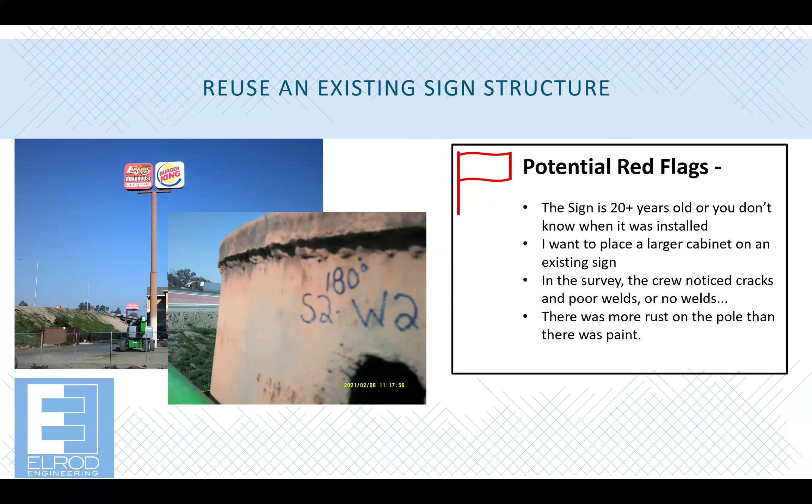Which gives us our point. So why would we want to invest in an inspection? We just went over the increase of storm patterns, existing structures that a lot of us use daily, public safety. And we've all heard of sign failures. Some have cost people their lives, and we want to help prevent those if possible. You and your client spend a large sum on signs. So anything that we can do to help prolong the life of it, we should definitely try.

These are some of the main reasons we see a need for inspections. And, of course, why we get so pumped to speak about them, it's truly a good day at work when we get to focus on structural inspection reports. So let's get into some of the weeds of what an inspection involves and some of the details we look at.

So one item that helps with any inspection is consistency, a ton of details for your crew to have when they're out in the field. So when first starting an inspection, we put together a detailed scope of work, images, callouts, and forms for your crew to use and fill in. We understand that the guys on site could be anywhere from 50 to 100 feet or more in the air. So we want to be sure that they have something simple and safe while getting all the information that we need.

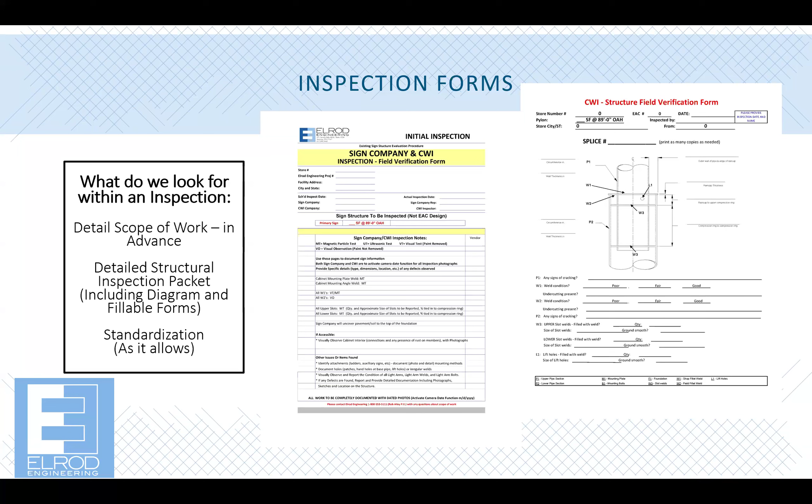We're an engineering firm, so we really enjoy getting tons of information. You can't overwhelm us with too many photos or notes. But this is just the beginning stages of when we research the sign, we create these forms and we really dig into what information we're going to need to perform an analysis to give you the best recommendation we can.

So who is involved in a structural inspection? Well, it takes a team. We utilize a certified welding inspection company, KTA. They're on site with the sign company to help test the welds and gauge the pipe thickness.

You yourself, the sign company, will be there. You are a vital part to make sure we have a lift, someone there on the sign, and we're all working together to gather the best data possible for the engineering review after the inspection takes place. Now, working with a large team like this does take some coordinating, but once you have an inspection approved, we can easily get a CWI tech scheduled to meet your crew on site.

KTA has partnered with us for years. They're very familiar with what we look for and can help crews make sure that we get all the data that we need. We also check in with the crews while they're on site. That way, if there's any centerline cracks or things that need to be addressed while you're there, we can take care of those. So it's also good to have a certified welder on site.

It can be beneficial when inspecting an unknown sign that may have some issues with it, because you just never know what you're going to see. I'm sure you guys have some stories to tell also of what you've seen on site.

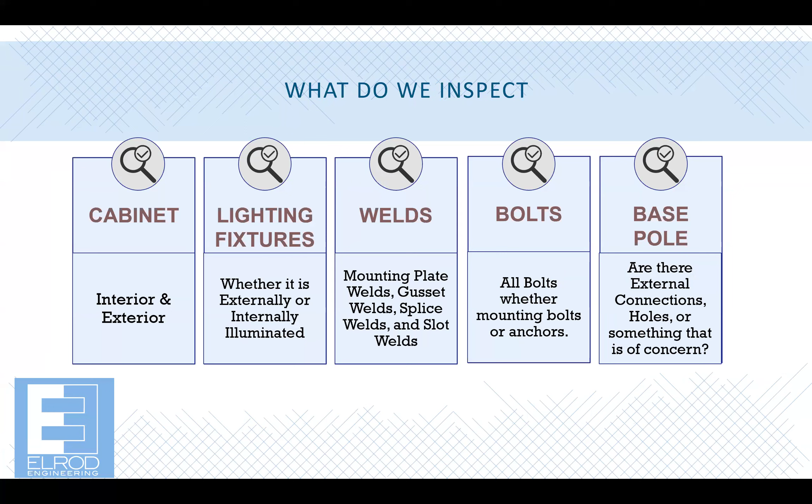So what do we look for in an inspection? We inspect the sign from the top of the cabinet to the bottom of the pipe. We can even get an excavation team out there to dig around the base of the pole and the foundation to confirm there's no corroding near or beneath grade on the pole.

We can inspect the interior LEDs or external light fixtures, because while we're there and while you all are on site, we want to gather all the information we can so that way you and your client can recommend and repair everything that needs to be done. If a light's out, we can get that fixed. So it's not just about the structural stuff. We want to take care of the non-structural stuff as well. We want to help preserve the brand image.

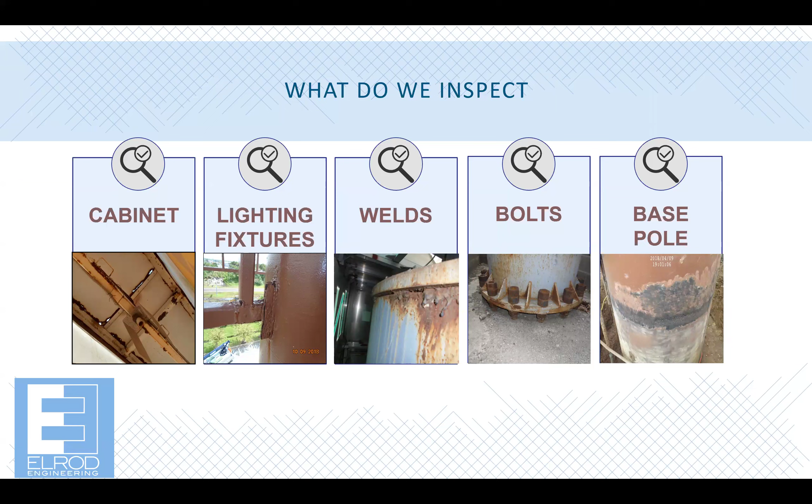So let's go ahead and get into what we look at for each specific location on the sign and some of the details behind it. So looking at a cabinet, the interior of the cabinet, we want to make sure that there's no significant moisture entering the cabinet, limited rust, paint peeling. We want to make sure the internal members are staying how they should, of course, and we also want to avoid any open holes in the top of the cabinet or areas that have rusted completely through.

As you can see in that first photo in the top of the cabinet, it's almost gone right there. You can see the sunlight coming through, which is not good. So we do see a lot of rust, paint peeling, and swollen members in the coastal regions. The protective coatings of primer and paint, even though they are on the interior of the sign, can really help protect the steel tubes from moisture and rust and help your sign last longer.

Some signs we suggest a protective coating to be applied after an inspection. We scrape the metal back down to bare, and then the coating is applied to aid further rust prevention and to help that sign. While we're in the interior of the cabinet, we can also look at electrical items. We want to make sure that everything is UL compliant and there's no hot wires that aren't capped off.

Water can also be an issue when it gets into sign cabinets. It can create rust, paint peeling. If it freezes in a tube, then that tube can swell. If a tube is swollen, there can be recommendations for adding some weep holes or additional angles or support that may be needed to confirm that those members don't fall.

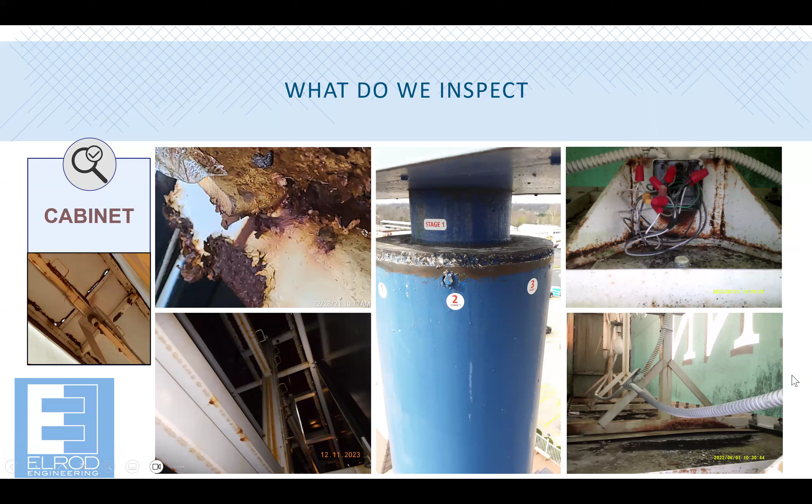You know, signs, sometimes we just need to give them some TLC. So light fixtures. Funny enough, a falling light arm actually started our national inspection program, one of them. And thankfully, it fell at night and it landed in a parking lot. It's actually sitting outside my desk right now. And man, y'all, those things can be heavy. So we definitely don't want them to fall on any cars or people.

So some signs still use external light fixtures. You have uplighting, downlighting, depending on codes, but we want to make sure that the light arms stay where they need to and not in the parking lot. When inspecting light arms, we would look at their mounting conditions, welds, plates, bolts, however they're going to be mounted to that cabinet. And then while crews are there and they're already up in the air, we want to make sure that the fixtures are illuminating, that they're not cracked. We want to add value to the inspection, and gathering that information for a light outage will be a benefit to you and your client.

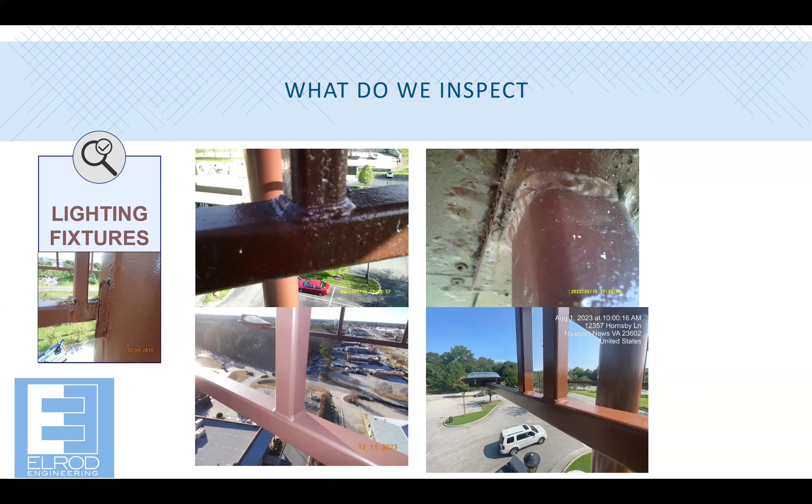Welds. Welds are essential to the integrity of the sign structure, and a good weld can be the difference between a sign failure and it standing through the storm. When a CWI crew is on site with the sign company, they're there to review the welds. The sign crew would remove the paint from the structure, and then the CWI can test the welds for porosity, to make sure it's the correct thickness that it needs to be, if there are any cracks, any visual defects that they can spot. They use magnetic particle testing equipment and ultrasonic testing equipment. Then they can also visually inspect it with or without the paint removal. It's easier, I think, once the paint is removed to actually see the weld.

Some of them, if you look at these photos, if the weld's very poor, you can tell with the paint on, of course. And so there are multiple welds that we would inspect in a multi-stage structure. The mounting plate weld, if there is one, we want to make sure that it's welded a full 100% around the circumference of the pipe and the plates. We would inspect all the splice welds, make sure that they reach a minimum thickness for the weld, so the pipes aren't moving back and forth if they have a high frequency. And then we would also check all the slot welds, make sure that they're tied into the compression ring. We want to make sure that there is a compression ring if there's a multi-stage sign. We had one recently that we were uncertain if there is, so verifying it, making sure we take the appropriate action and the repairs as necessary.

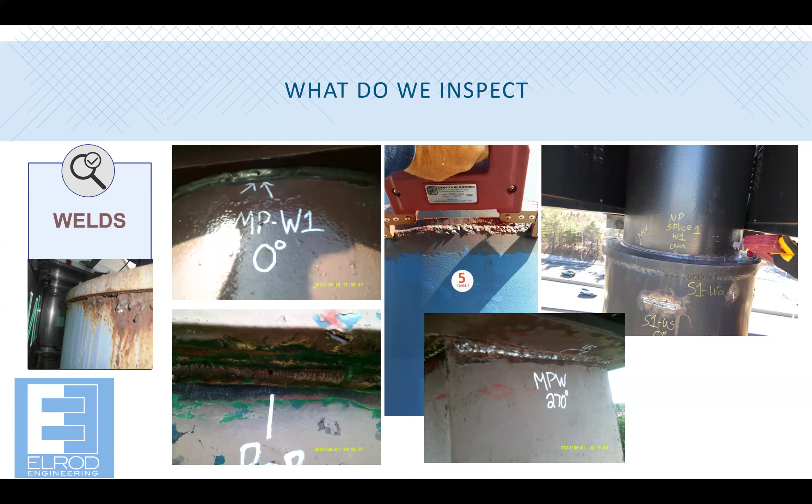Anchor bolts need to penetrate, we think, at least 2 threads just to make sure it's in there. And then engineering specifics: if you have previous drawings, most of the time we call out the bolt type. We want to make sure that those are being followed as well to help with the integrity and the design of that sign per your engineering.

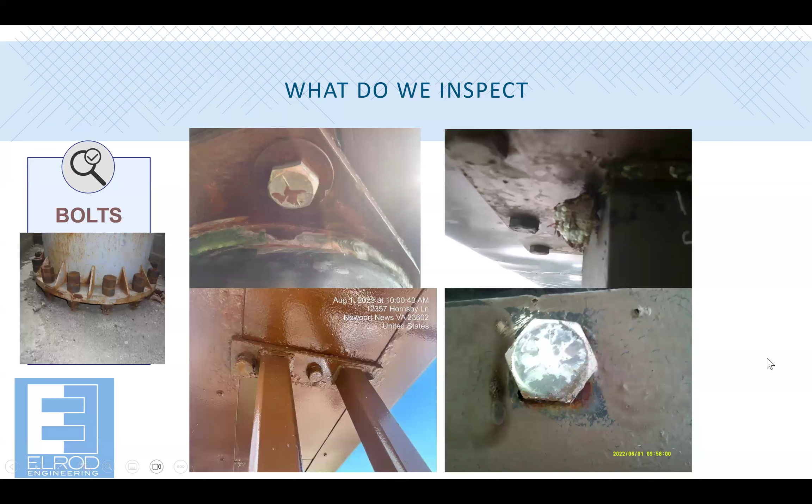And then next, the base of the pole. The base of the pole can also be inspected. Sometimes we excavate them out just to make sure that there's no pitting, possibly due to galvanic corrosion from soil interaction. If there's a sprinkler in and around that area, the base of the pole, it can create some pitting, and if that's not stopped, we'll see section loss and weakening of the pole.

With weed eaters, we make sure that there's a weed eater guard around. Anything that's going to take chunks out of that sign to weaken it, we don't want to see. So now, after we inspect the sign from top to bottom, let's look at what comes next.

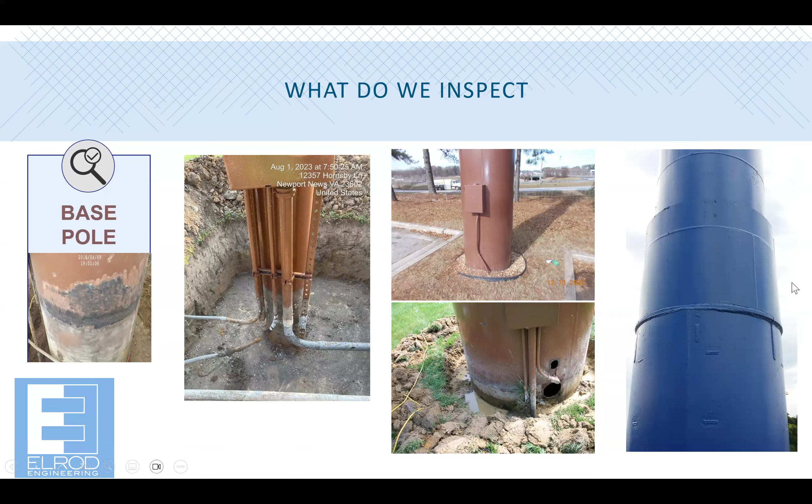So the summary from the CWI basically puts their testing data and other information into a more readable format for us and your client. This would be sent to you as well as part of that final package. And then the other 2 pages come along with it. They have the survey forms as well that they put their data in.

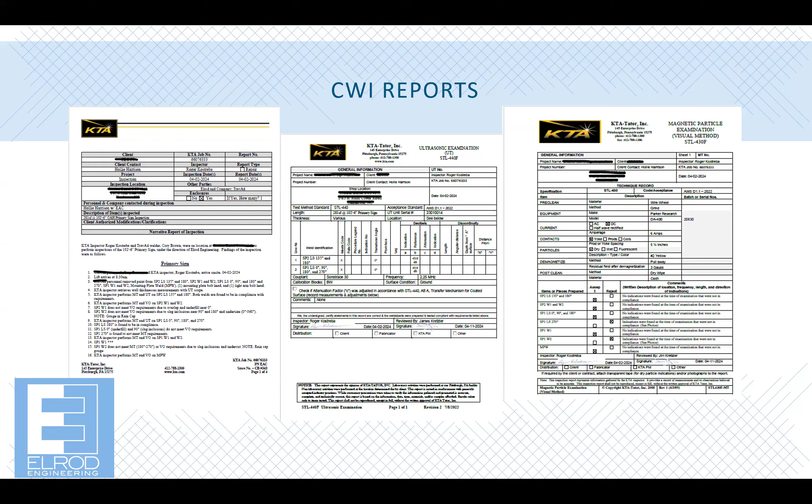So the structural analysis is a part of the inspection, but I wanted to explain a bit more what that truly is. When you're building a new sign and getting engineering, your engineer will create calculations that determine the size of the foundation, your pole size, all those essential details to build your sign per current code. Then if you're reusing an existing sign that's already been designed, we have to analyze what's currently there to existing code. So it's making sure we have all that information to analyze your sign properly.

So our engineering team will take the dimensions, the pipe thickness, and create that structural analysis that looks at the frequency of the structure to determine if it's overstressed, which can play a significant factor in welds, or if it meets current code. Even if a sign is grandfathered in, it can still be overstressed, and action can be taken to help alleviate that additional stress on the pipes and welds.